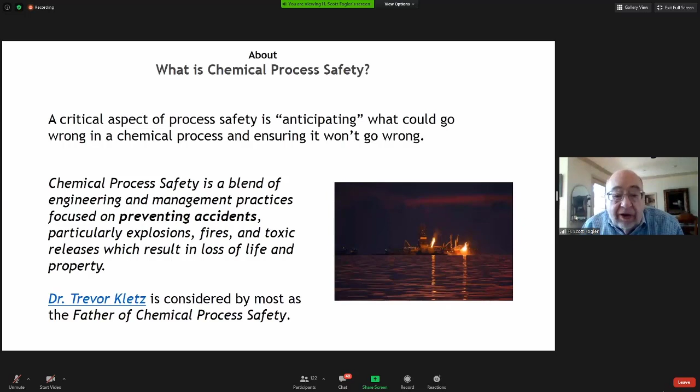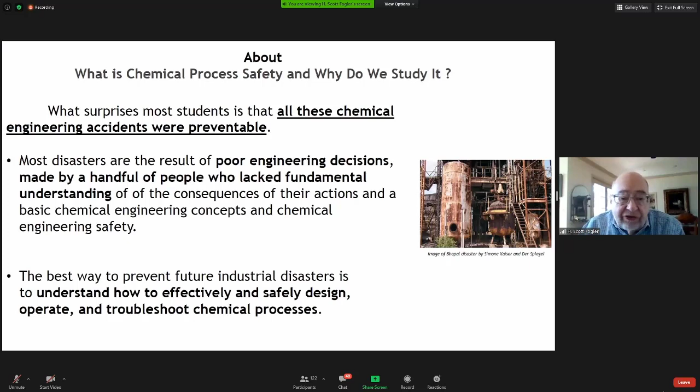What surprises most people is that almost all these chemical engineering accidents were preventable. Most disasters are the result of poor engineering decisions made by just a handful of people who lacked a fundamental understanding of the consequences of their actions and basic chemical engineering concepts and chemical engineering safety. The best way to prevent future industrial disasters is to understand how to effectively and safely design, operate, and troubleshoot chemical processes.

Sometimes safety is taught in a separate course in the department, like heat transfer and so on, and sometimes it's only taught senior year as part of the process design course. Here's the course taught at Michigan: it's once a week for 2.5 hours, and usually has people from outside the university, from industry, come in and talk. It's led by Ken First.

So this is the course we offer, Thursday afternoons at 4 o'clock, which isn't a really good time. So how many people do you think attend this course? Anybody shout out? How many people come to this course to learn about process safety? Anybody? No one? No, a little more than that. We have about 100 students graduating every year, and at best 10 to 14 take that course. So that's not very many.

So the purpose of this website is to provide case studies and resources so that process design and process safety can be effectively and easily learned throughout the chemical engineering curriculum. If somebody just took that course, we're only going to reach 10 to 14 people out of 100 graduating. But if we offer it throughout the curriculum, then we'll reach much more.

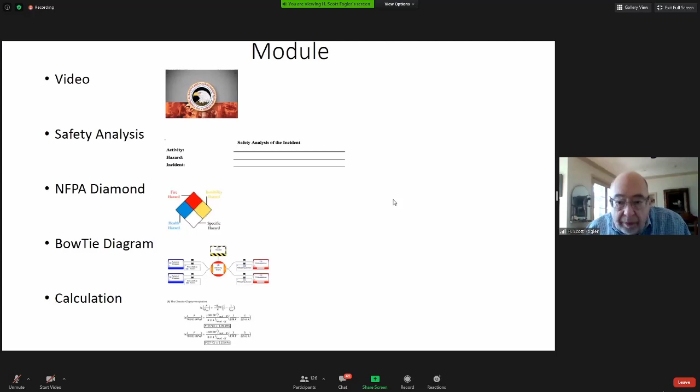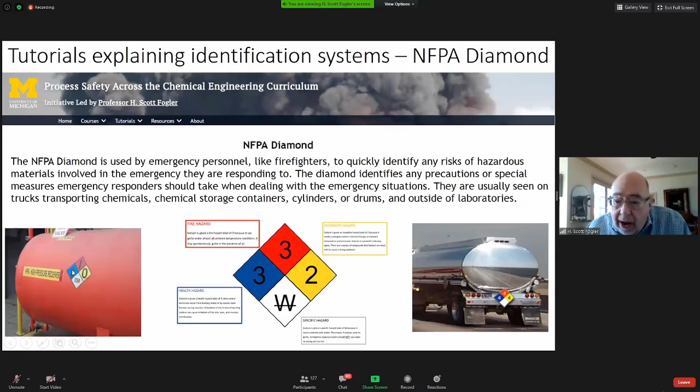First, let's look at the tutorials. One is the NFPA diamond. This can be found put on containers. What's more used now is the Globally Harmonized System, particularly used in Europe. So one of these stickers would go on explosive, oxidizing, harmful irritant, and so on. This will be replacing the NFPA diamond.

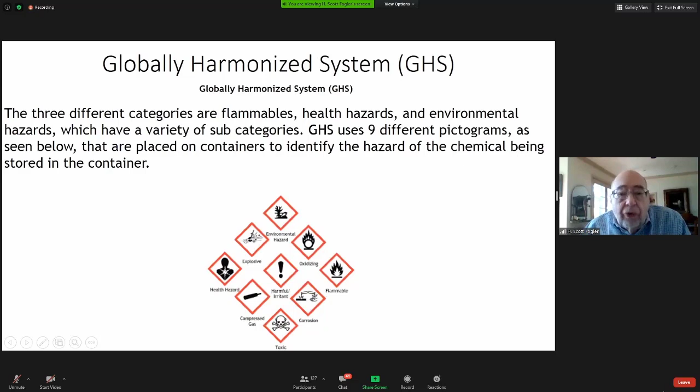Also the Swiss cheese model. You're going to put up barriers, but there's always going to be a way through these barriers, and you're going to have an incident. You put controls, but something could get through, so you have to plan on that.

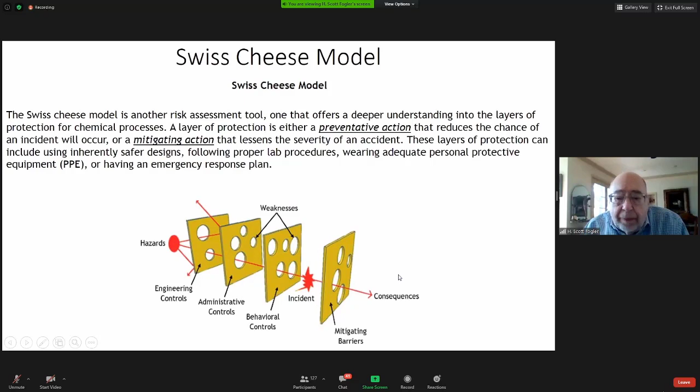So here's what we want to get ingrained in every student: this is a safety analysis of the incident. The first thing you do is view the video. Then you ask, what is the activity? What is the hazard? What is the initiating event?

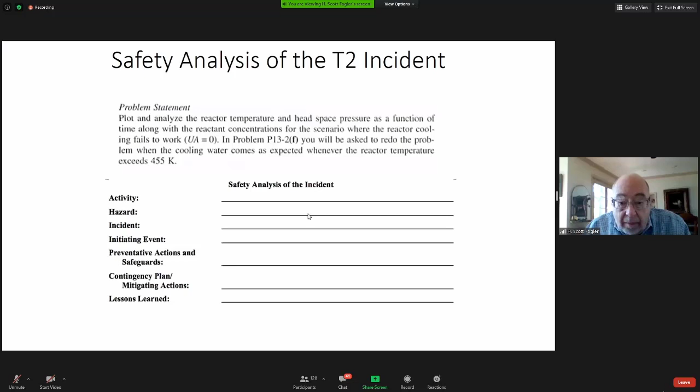What could have prevented the accident? I couldn't prevent it, but what can I do to mitigate the accident? And then, what did I learn? These are all spelled out: the process, hazard, incident, initiating event, what could have prevented it, and what could have mitigated it.

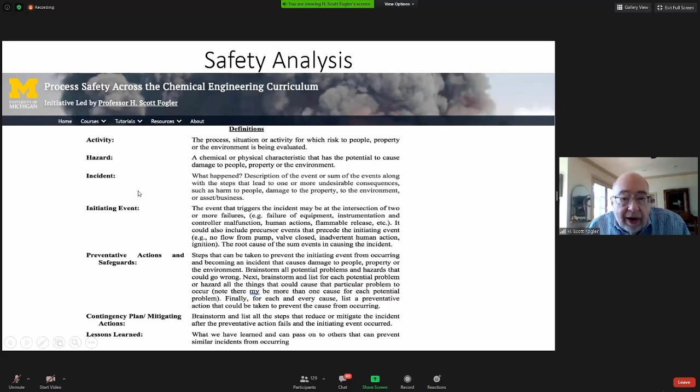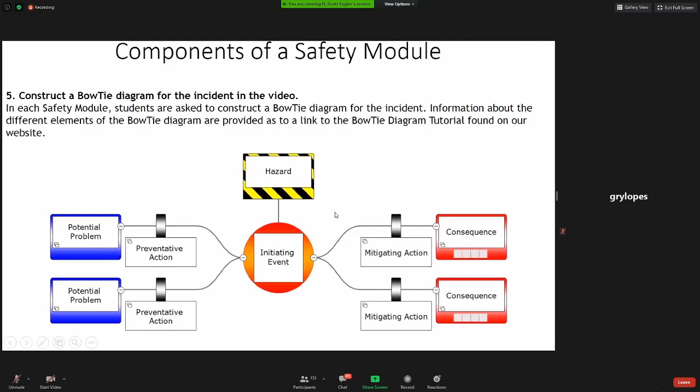Now in the U.S., some companies like BASF record every unsafe incident and then determine what they could do to prevent that unsafe incident from happening again.

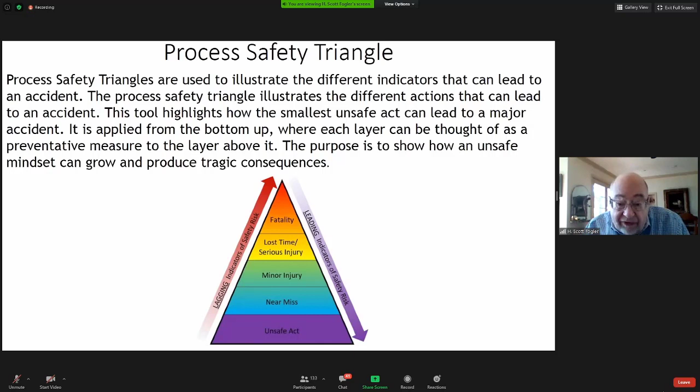So let's go through one specific module. I'm going to come down here, and we're going to look at thermodynamics. I'm going to click over here, then come up to thermodynamics safety modules. We're going to look at the Praxair cylinder fire and explosion.

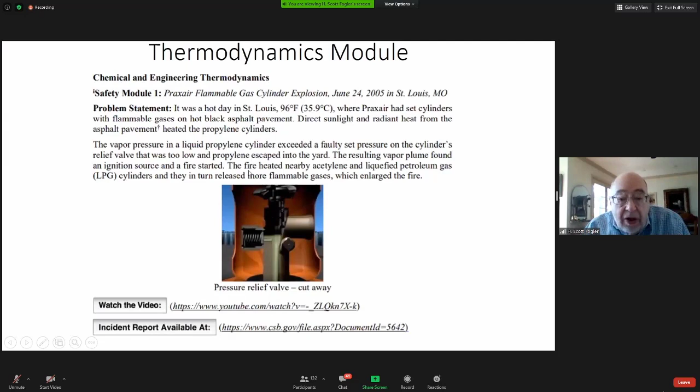On a scorching day in June 2005, propylene gas venting from a cylinder at a compressed gas filling and distribution facility ignited, setting off fires and explosions that lasted 5 hours.

On June 24, 2005, St. Louis was experiencing a heat wave. The high temperature that day was recorded at 96 degrees. At Praxair, thousands of compressed gas cylinders containing highly flammable products such as propylene, propane, and acetylene were stored outside in direct sunlight. As the sunlight beat down on the cylinders, heat also radiated from the asphalt, driving up the temperature and pressure of the gases inside the cylinders.

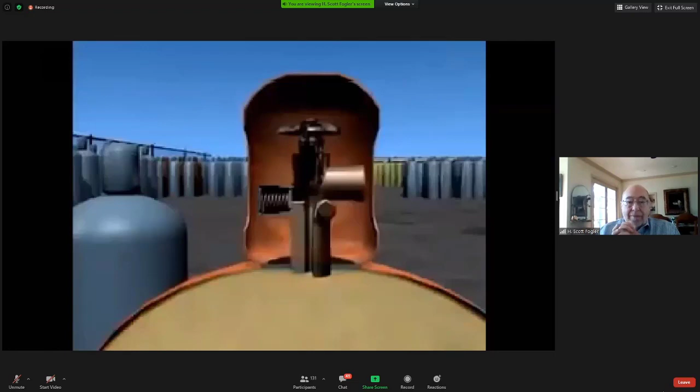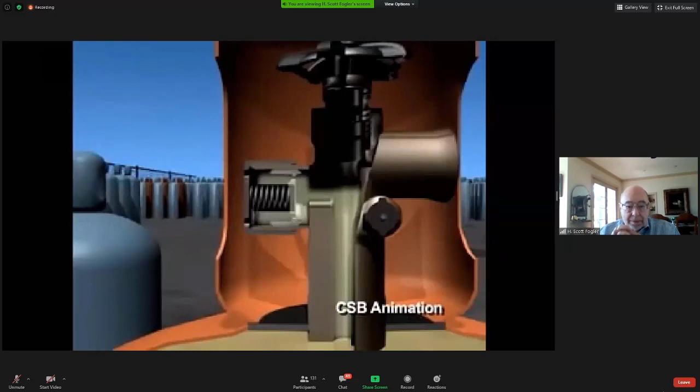At about 3:20 p.m., increasing pressure inside one cylinder activated its pressure relief valve. Gas pushed against the spring-loaded plug, allowing propylene to flow around it. Gas moved past the spring, out of the valve, and through openings in the cylinder cap. The propylene vented to the outside air and formed a flammable vapor cloud around the top of the cylinder.

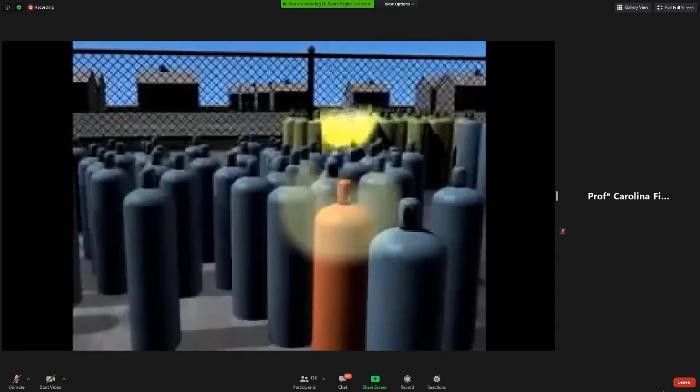A static charge, created by the venting propylene, most likely ignited the vapor. A Praxair security camera recorded the vapor release and ignition.

The vapor begins escaping from the cylinder seconds before 3:20 p.m. It ignites immediately. An employee sees the fire and sounds the alarm. Within 30 seconds, the fire is spreading rapidly, heating surrounding cylinders, causing them to vent gas, adding more fuel to the flames. Just over 1 minute after the initial vapor release, smoke begins to darken the facility as the fire rapidly grows out of control.

90 seconds into the incident, the camera records blinding flashes as cylinders begin to explode. Cylinders begin rocketing through the air, further spreading the fire.

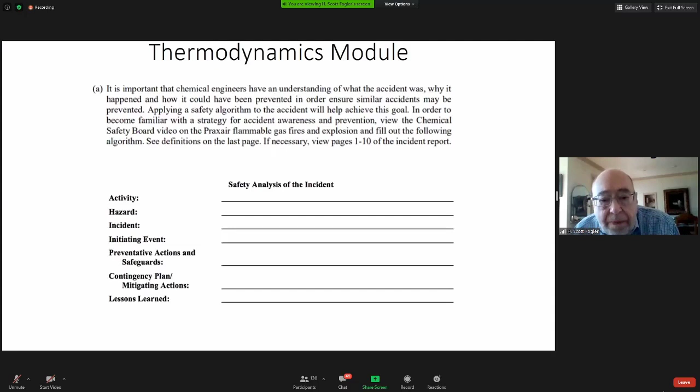Okay, so they've seen the video. Now what they're asked to do is come and do a safety analysis of the incident. What was the activity? The activity is storage of propylene cylinders. Hazard: flammable propylene. Incident: the pressure in the storage tanks reaching the set point, which vented propylene. The release of the flammable gas led to the explosion. So we start filling out this activity, hazard, incident.

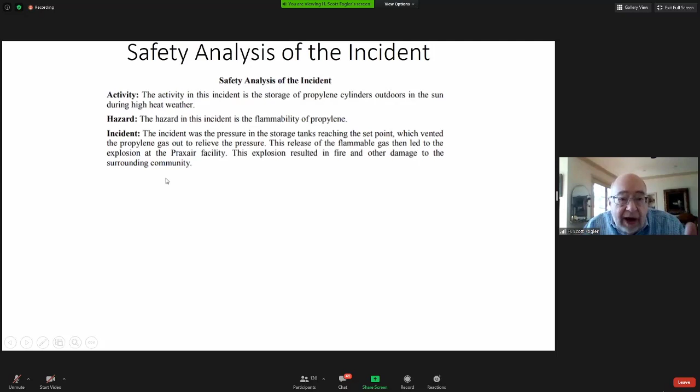What was the initiating event? The release of propylene due to increase in pressure. Preventive safeguards - well, what could they have done? Maybe they could have stored the cylinders farther apart or put barriers between them so that if one cylinder caught fire, it wouldn't ignite the other.

Mitigating actions - well, they could have had maybe a sprinkler system. They could have covered preventative action. In terms of preventative action, they could have put sheds over the cylinders to shield them from the sunlight. So those are preventive actions. Contingency actions could have been a sprinkler system that would come down and cool that. So that's what they do for this incident.

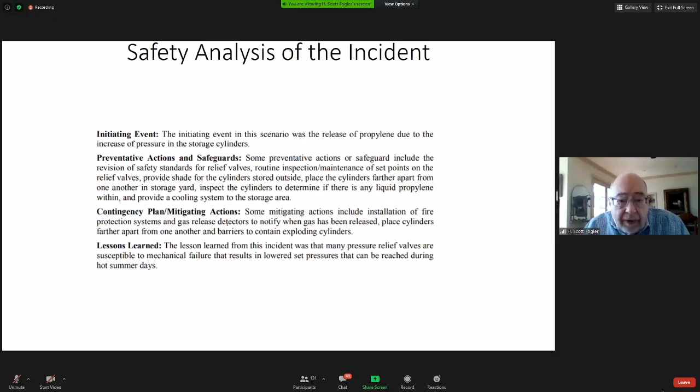Now we look at the safety module solutions. They had to fill out a bow tie diagram as well. So, okay, potential problem would be a mechanical failure of the valves. What would be preventive action? Routine inspection, routine replacement. Here's the hazard.

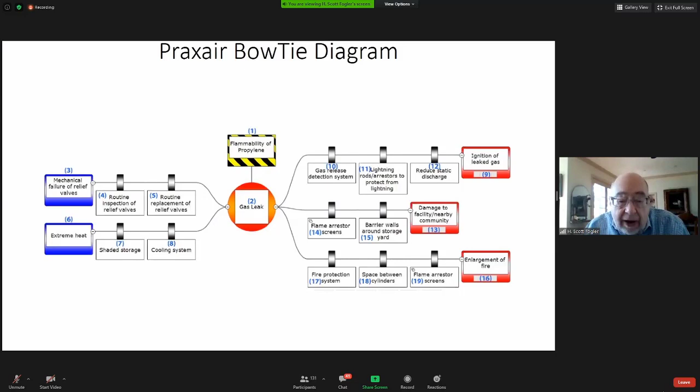The initiating event was a gas leak. What would have mitigated it? A gas detection system, lightning rods or arrestors, reduced static discharge. So these are the things that could prevent it, and these are the things that could mitigate. And it's important we understand: prevent, it happened, now mitigate. So the students then are expected to fill out this bow tie diagram.

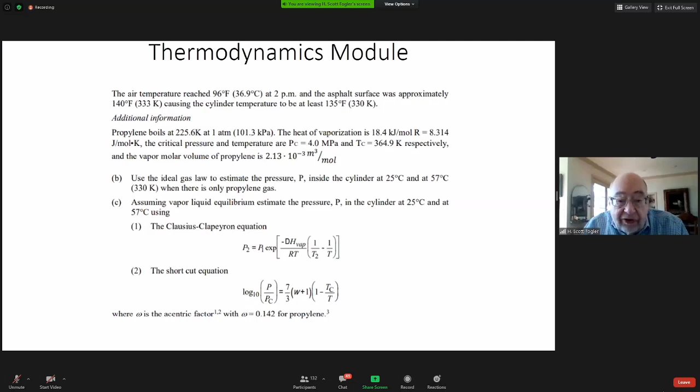The next thing they do is a calculation specific to this module. If they're asked, in this case, what is the pressure inside the cylinder, they do a calculation using the ideal gas law. If they do that, they'll find that the pressure is way below the set point of the cylinder. But in the cylinder, we have two phases, liquid and gas, so we cannot use the ideal gas law. We either have to use the Clausius-Clapeyron equation or the shortcut equation. The students do a calculation to calculate the pressure in the cylinders.

So that's the module: view the video, fill out the safety analysis sheet, then do a bow tie diagram, and do a calculation.

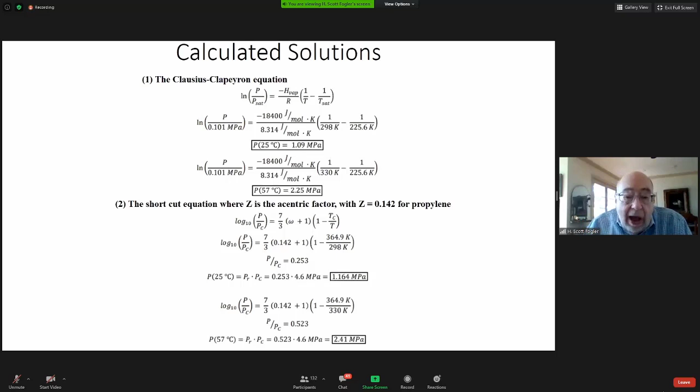Let's look at one more. I'll just cut this short. So let's go to the material and energy balances course. This is CAPECO. It occurred in Puerto Rico.

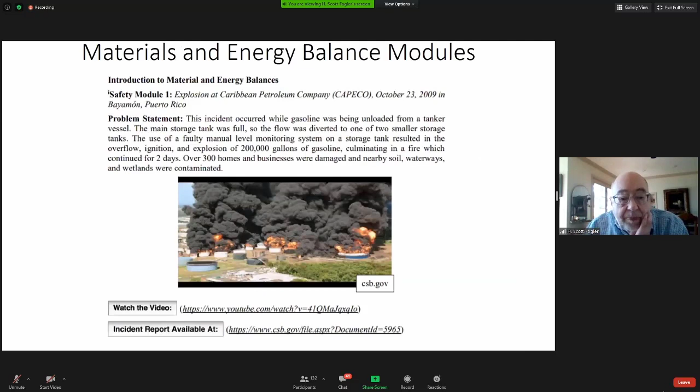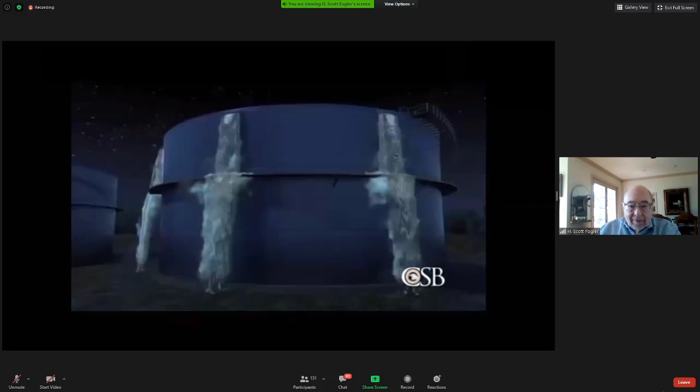October 23rd, 2009. A massive explosion rocked the Caribbean Petroleum Terminal facility near San Juan, Puerto Rico. Gasoline overflowed and sprayed out from a large above-ground storage tank, forming a huge vapor cloud which ignited. The explosion damaged nearby homes and businesses. Petroleum leaked into the surrounding soil, waterways, and wetlands. Fires burned for more than 2 days, destroying 17 of the facility's 48 storage tanks.

Well, there's more to the video, but I only showed a small cut. Again, what was the activity?

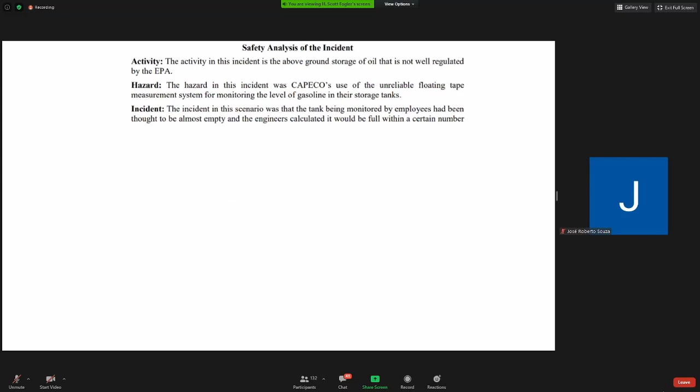What was the hazard? In the CAPECO incident, they had an unreliable floating tape measurement to tell how much gasoline was in the system. The gasoline overflowed.

Could have been a routine inspection, replacement of the measurement system, automatic overfill protection. So these are all preventative actions. Then the hazard and the overflowing of tanks was the initiating event.

They could have then had a mitigating action, which would have been an alarm system and secondary containment. So again, let's get in the mindset of thinking prevent, occur, mitigate.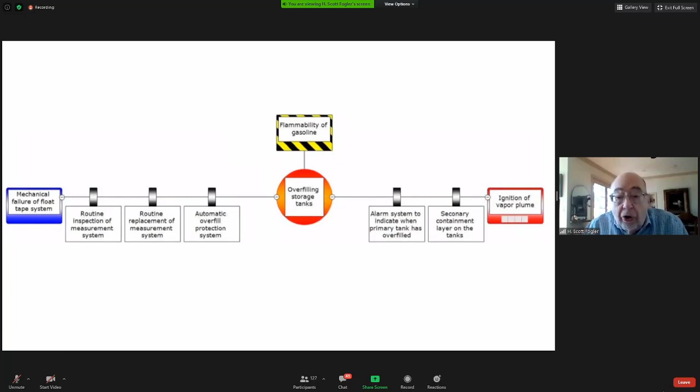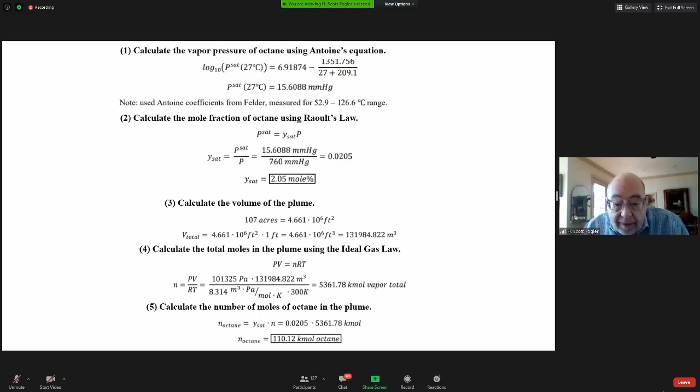And again, they do a calculation and say how much gasoline vapor was on the ground at the tank, and they find out the number of moles, kilomoles of octane, an enormous amount.

Another one here is this is in heat and mass transfer. June 13th, 2013, the Williams-Geismar Olefins plant in Geismar, Louisiana. A heat exchanger violently ruptured, causing an explosion and fire that killed 2 workers.

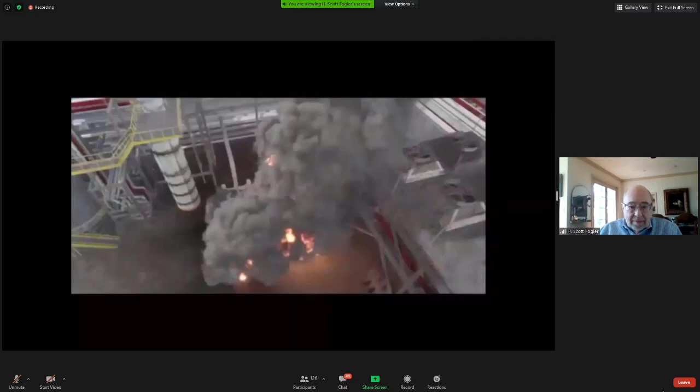The Chemical Safety Board launched an investigation and issued a case study. In it, the agency describes a number of process safety management program deficiencies at Williams, which set the stage for the incident. In particular, the CSB found that the heat exchanger that failed was completely isolated from its pressure relief valve.

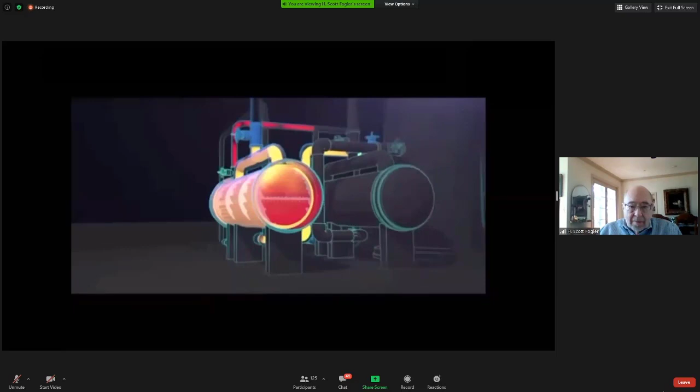When pressure inside the heat exchanger dangerously increased, there was nothing to stop a catastrophic rupture.

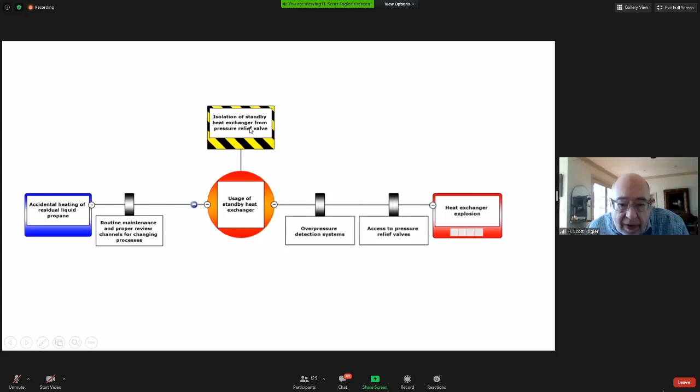Again, you do your bow tie diagram: accidental heating of the liquid, the initiating event, and preventative actions. And then you do your calculation here.

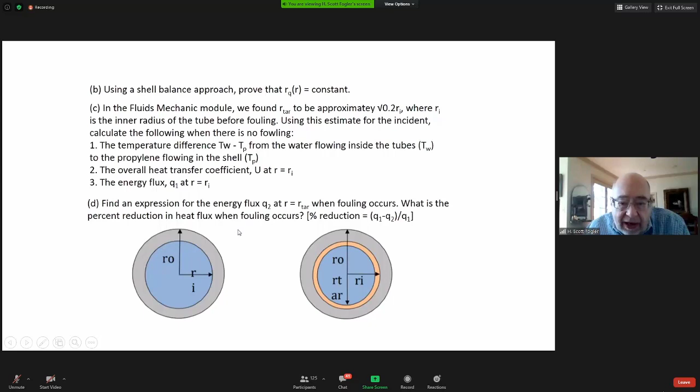And one of the things could have been, what is the thickness of insulation on the heat exchanger and so on. You do a calculation.

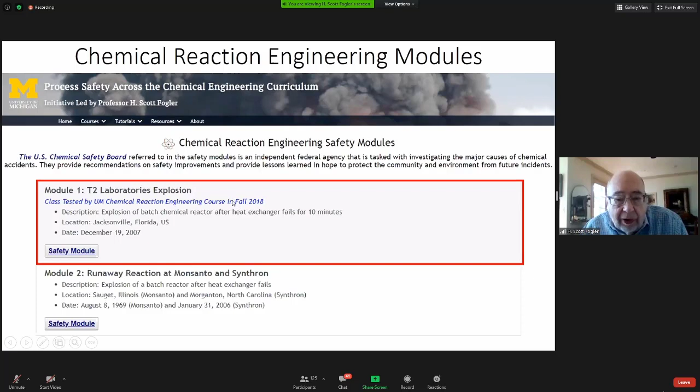And the final one I want to talk about is in chemical reaction engineering, and this is the T2 Laboratories incident. So let's go to here.

On December 19th, 2007, a powerful explosion and fire occurred at T2 Laboratories, a small chemical producer in Jacksonville, Florida. The blast killed and injured workers, destroyed T2 Laboratories, and extensively damaged 4 nearby businesses.

Windows blew into offices, striking workers with flying glass.

Okay, there's more to that video.

In this one, those of you that have my book, this is in chapter 13. And this now is a living example problem.

What I'd like you to do is go to my website and then go to living example 13. And then you can vary all these variables that occurred: this is the temperature that occurred as a function of time, the concentration, the pressure.

And so you can then essentially, with this living example problem, you could say, what conditions would I have that would have prevented this explosion? And you use the Wolfram sliders.

So let me just stop and say something about Wolfram and Python. This is the future of chemical engineering, using Wolfram and Python and using the sliders.

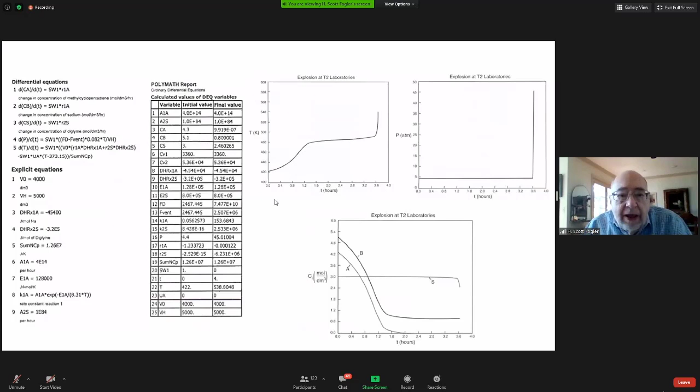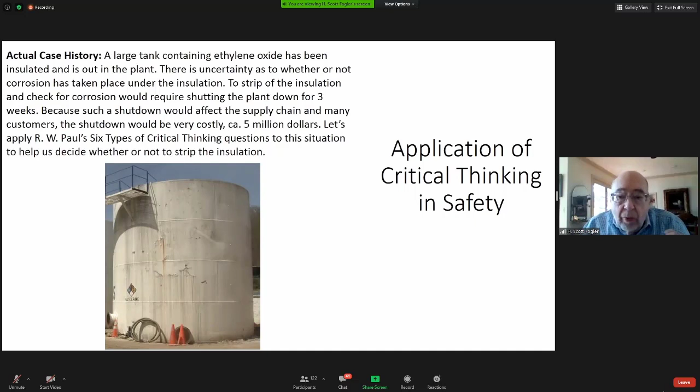So let's apply R.W. Paul's 6 types of critical thinking questions to this situation. Now, when I teach, I always teach critical thinking. What is critical thinking? That can best be described by asking critical thinking type questions, and Socratic questioning is at the heart of critical thinking. There are 6 types: questions about the question, questions for clarification, questions that probe assumptions, questions that probe reasons and evidence, questions about viewpoints and perspective, and questions that probe implications.

When you leave the university, you're going to go out in industry, and you're going to be in team meetings with maybe 5 or 6 people discussing a project, a piece of equipment, or whatever. If you want to become really known as a resource to your company, think about a question you can ask, but make it a critical thinking question, not 'what's the weather outside today, can we go outside and work?' No, think about a critical thinking question about the project at hand.

So let's look at the first one: questions about the question. The main purpose is, what is the main question you want to answer? What is the point of this question? For the example we're considering, we have this tank. We want to stop production and go inside the tank and look at the siding. Not 'what's the weather outside today, can we?' So here we go - critical thinking question: why do you think I questioned you about the corrosion under the insulation, considering the storage tank is only 10 years old? That's an example of a critical thinking question about the question.

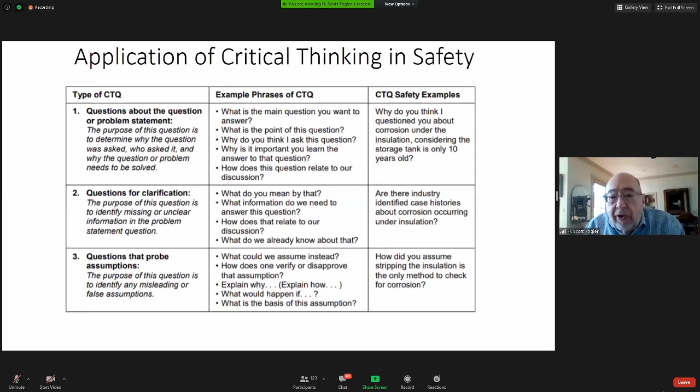Questions to probe assumptions: what can we assume instead? How did you assume stripping the insulation is the only method to check for corrosion? You see these types of critical thinking questions we need to develop so we can start challenging things?

Questions to probe reasons and evidence. What would be an example? Why has this happened? What evidence do you have that corrosion may have occurred in this tank in the last 10 years?

Questions to probe viewpoints and perspectives: what is a counter-argument? What are the strengths and weaknesses of your viewpoint? Here it would be: what are counter-arguments for taking all the insulation off and inspecting the tank? Well, one would be the cost.

And questions to probe implications and consequences: what are the consequences if that assumption turns out to be false? What are the consequences of ethylene oxide leaking into the atmosphere on people, equipment, and the environment? So those are R.W. Paul's 6 types of critical thinking questions applied to this example where we have a tank that we think has corrosion occurring under the insulation.

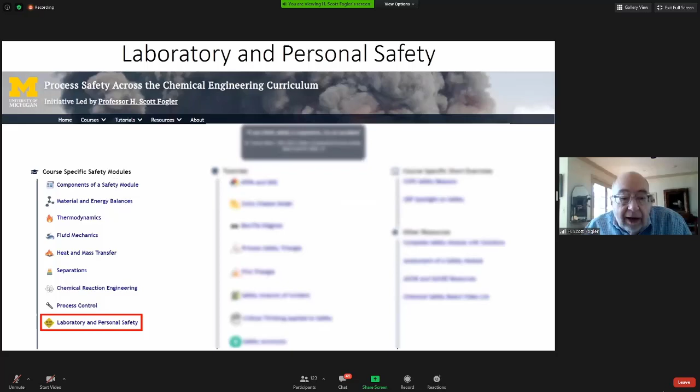Okay, let's look now at laboratories. We all have laboratory safety, and these are very short videos we have - you would like them. I'm just going to look at one of these, but these are fun. These were made by electrical engineering students at the University of Michigan. As you know, electrical engineers are doing a lot of chemical engineering work by making computer chips. If you looked at chapter 10, I describe how to make a computer chip there. So when you have time, this one is fun right here, Food in the Lab.

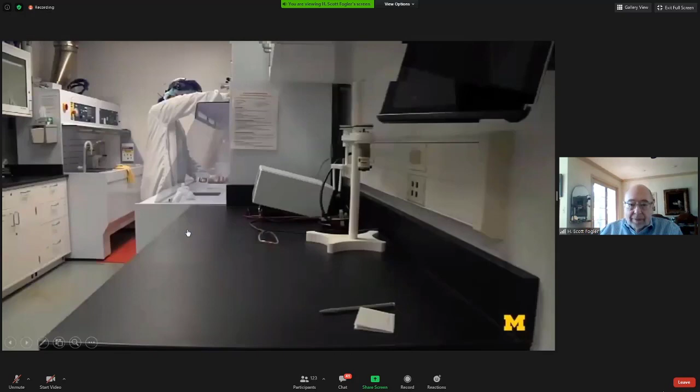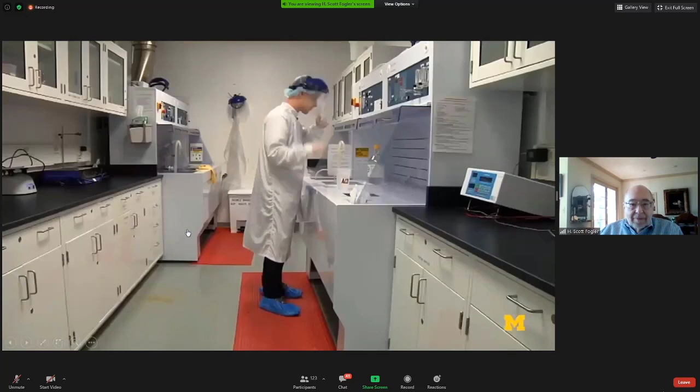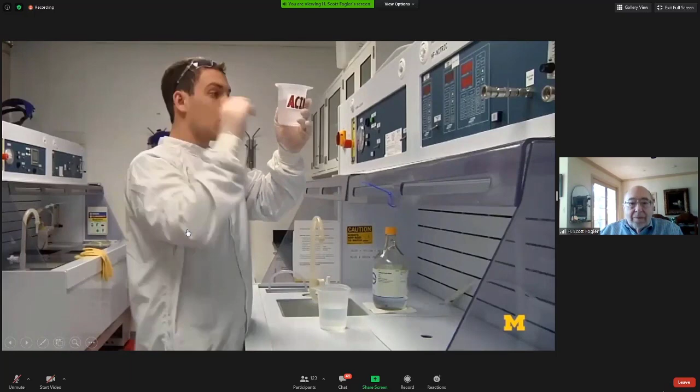These stupid goggles, I can't see a thing out of them. Much better, huh?

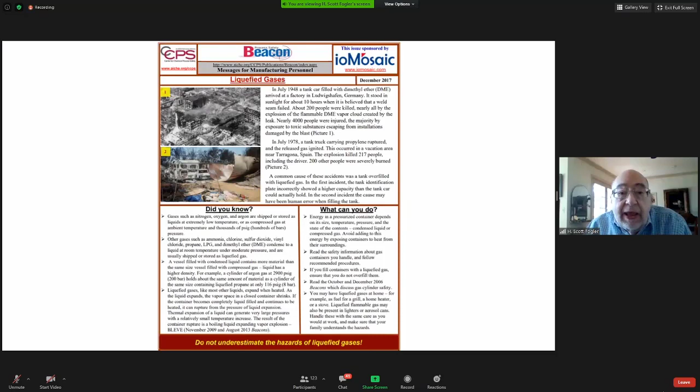So there's more of those that you can look at on your own time. I also put up references from the chemical AICHE, where they come out with the safety beacon every month, with little questions about the safety beacon for you to answer, and then you can see the answers in red. Also the spotlight on safety in every chemical engineering progress every month - you read the one-page article, and then you answer some questions, explain, and so on.

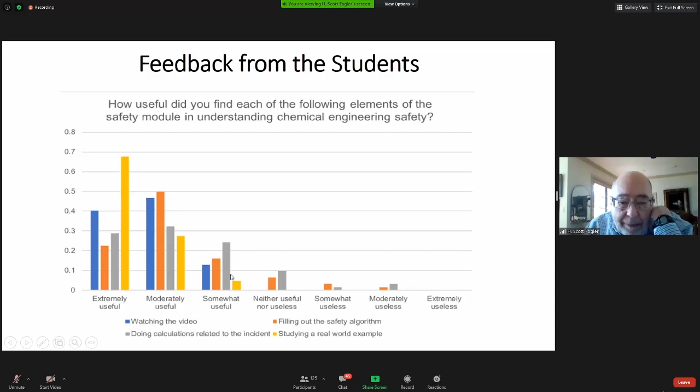So anyway, that's what's on the website. The department put quite a bit of money into this, and they wanted to see how it went, so they evaluated it. We had about 120 students in the thermodynamics course, and asked how the students liked it. Here's the bar graph: virtually 80% found it extremely useful or moderately useful, 90% useful overall, and very few did not. At the end, students were asked questions, and they responded that it was insightful to learn and see the consequences when safety factors were not properly considered.

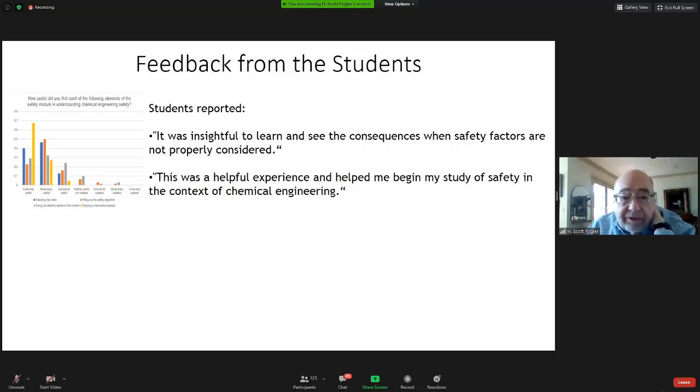It's a helpful experience and helped me begin my study of safety in the context of chemical engineering. The safety module was interesting. So anyway, in a nutshell, it got very positive reviews on the class testing that we had at the University of Michigan of 120 students.

And the students continue to cooperate on that. And this then is just the people. We've had industrial members look and guide us in this, from Dow, Bechtel, Reliance, and so on.

So the conclusions are the students viewed a number of case histories and videos and analyzed them, the reoccurring safety algorithms, the bow tie diagram, and get across what we hope. They instill a mindset about safety, and that's what their purpose was.

Every student has safety training rather than a small fraction of the class. Why? Because there's a safety module in every course. The bow tie diagram is repeated in every course, and so they all get safety training.

The students see disastrous consequences when safety conditions are violated and an accident occurred. These modules have received positive response from the classes. They were class tested, and now virtually all the modules have been class tested at the University of Michigan.

So it's time to end, and if you don't stop on time, bad things can happen. So thank you, and I'll be happy to answer any questions.

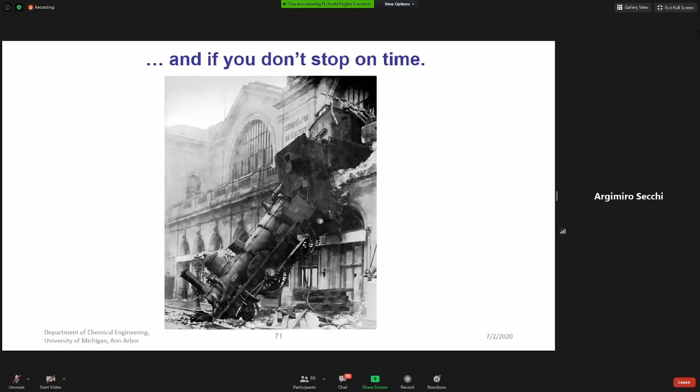Hello, good morning. Thank you for your lecture, Professor Fogler. I find it very nice that you have this interest in teaching safety and critical thinking in the chemical engineering courses. As Professor Falabella, I would also like to make a question related to the coronavirus crisis. Now that people are paying attention to safety of humans against diseases, do you think this is an opening path to people also paying attention to safety as a whole, including chemical processes and industries? Or what changes do you think are going to happen in the world after the coronavirus crisis?

Well, the problem is here in the U.S., and I think the same in Brazil, is people still aren't taking this seriously. In New York, Governor Cuomo did a fantastic job. Cases rose up, he was on TV every day saying, look folks, it's up to you: wear the mask, social distance, don't go out in crowds. Now New York is down to very few cases. It's a model system, and shortly after, New Jersey came on and they're down too, and Connecticut, all the states around New York. So it shows that if people follow the rules, masks, no crowds, and so on, we can beat the virus. But what's happening now in California, Arizona, and Florida is that people are going out and not paying attention to these rules.